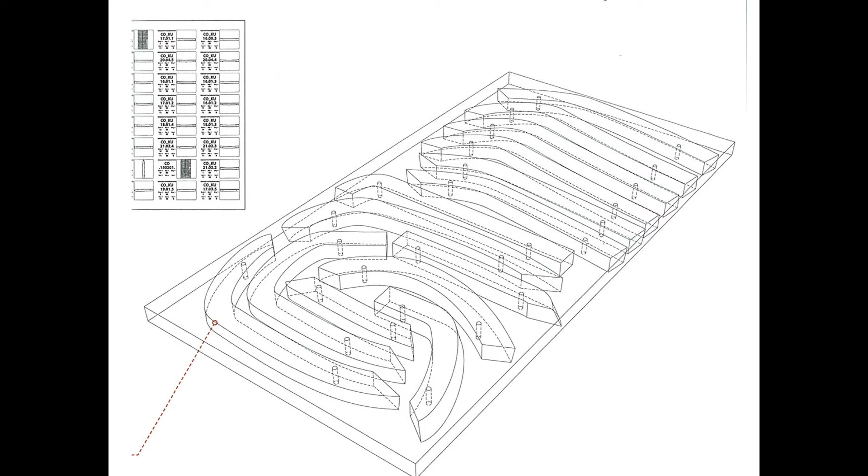in our manufacturing techniques. So here you can see what we do a lot of, which is a just-in-time manufacturing process where we're able to send our computer files to be fabricated, often in different countries like China. And this is an example from Zaha Hadid, which then can come to site even though it's fabricated in another country and fit together perfectly and get a beautiful result.

So I'd like to start with the first project where we apply our 3D digital technology to facade technology and come up with interesting, exciting designs on a project called ELIZA. Now, ELIZA is located here in Elizabeth Street in the centre of Sydney, opposite Hyde Park, a very famous park. We use our parametric designs to identify that there are different views from different levels, and accordingly we have also different sun orientations.

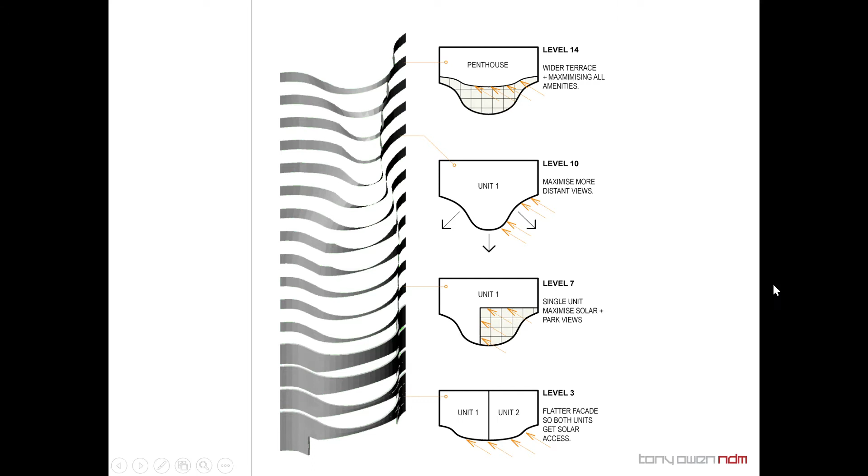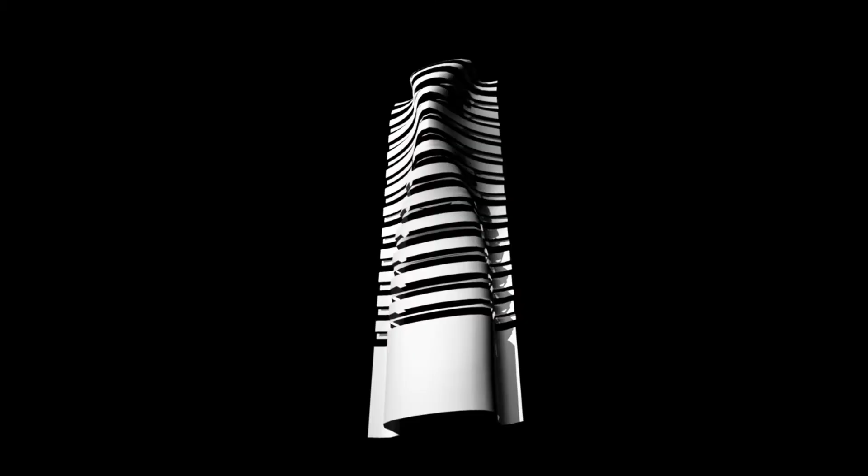So the shape of the building at each level changes parametrically depending on what the views are, what the sun is, etc. And you can see here on lower levels we have a pair of units with one shape floor plate, and as you get higher up a single unit per floor with better views and different orientated views, so you get a different shape. So the model that resulted from this reflects the fact that the conditions at one level are quite different to another level.

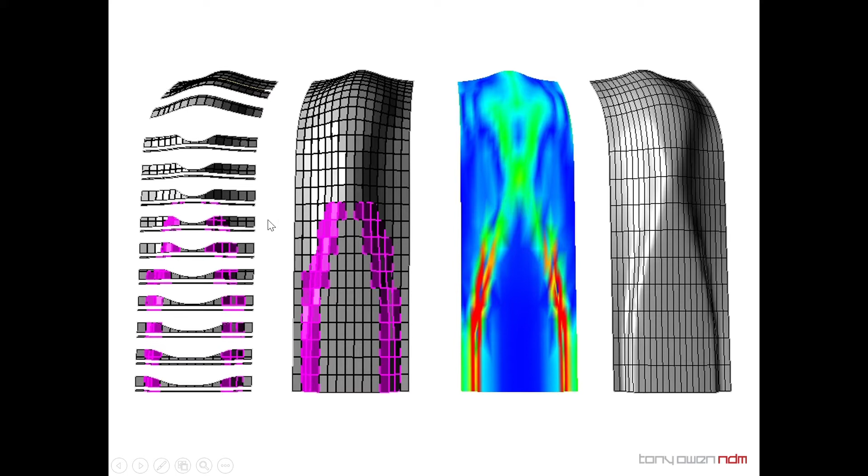And we then use the 3D digital software to identify how we fabricate this. And this starts on the right with the shape. We then do some analysis of the different curvatures and therefore the different stresses in the facade. And then we standardize this, and that results in the panel package. And this then goes on for a more sophisticated Rhino model. So this facade was actually documented in Rhino. And you can see an example here of looking at the different stresses on the facade and the different curvatures.

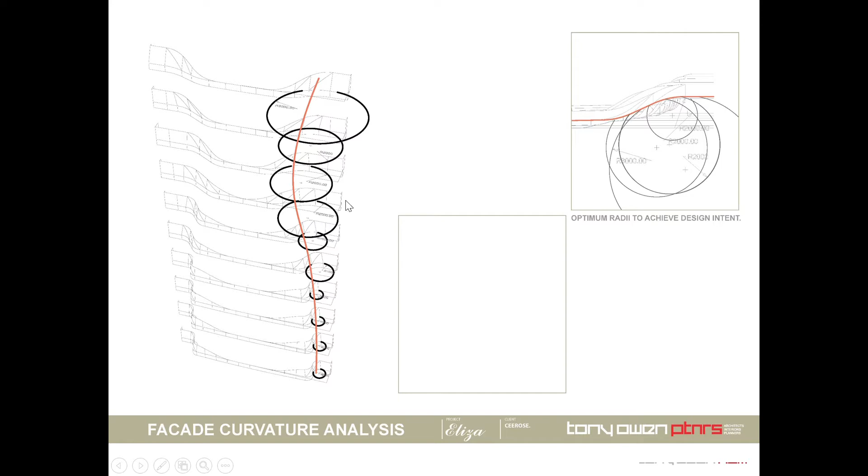So what we're trying to do is use the technology to take a complex facade and actually make it a lot simpler to build. So we're trying to, in the design development process, take out the randomness and add some rationality. In this case, we look at the curvature on the point of contraflexure here, and so we can have as much standardization in these panels as possible, whilst it appearing to be quite random. In fact, it isn't.

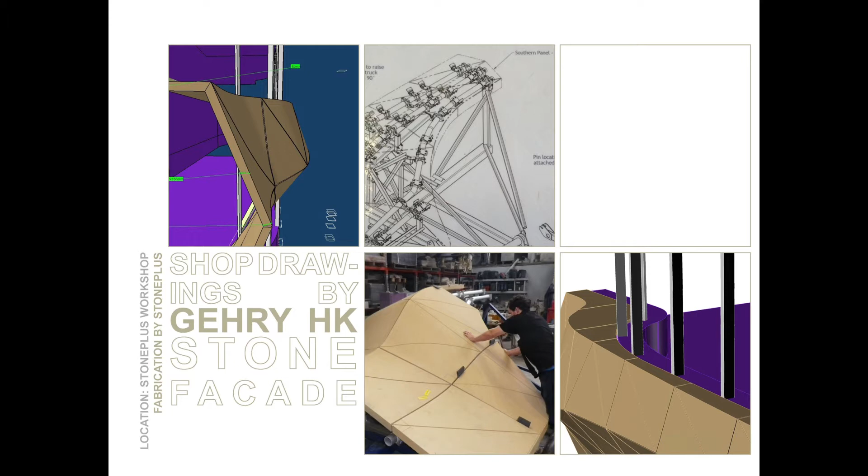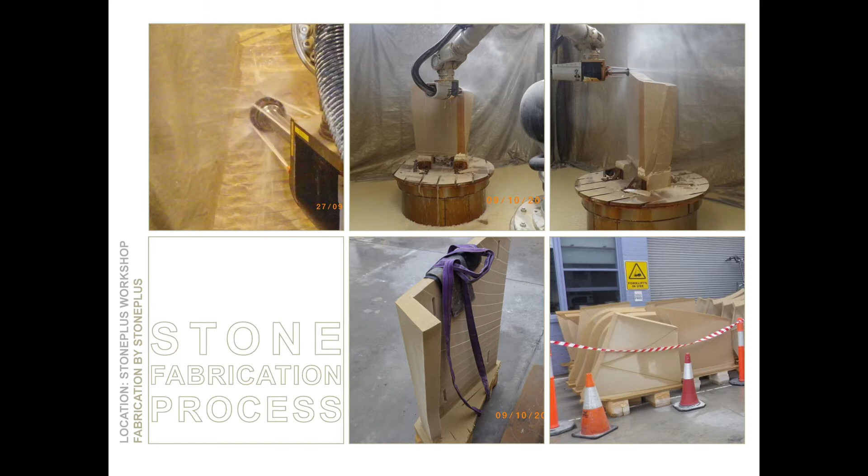And this carries through to a one-to-one prototype which was prepared, and this was carried further in the Rhino model, and that was actually a model of the podium, which is done in sandstone. This sandstone was actually again created as a one-to-one prototype with some sophisticated steel work. In this case, Gehry Technologies helped us with the facade engineering. The stone itself is cut out by robots according to our files, and so it fits together perfectly.

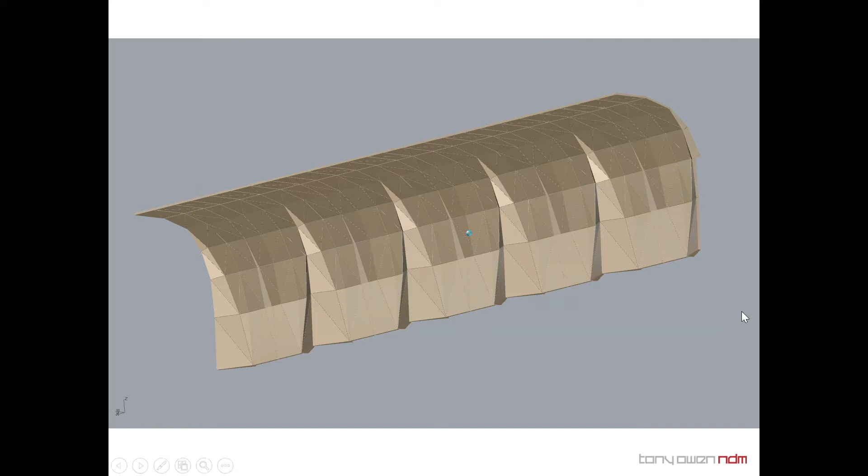Another project which we used some similar techniques in what we call radical pragmatism, where we take problems on the site and try to solve them very pragmatically, yet at the same time producing some very extraordinary results. This is a site in, again, a historical part of the city, where we were heavily overshadowed by other buildings.

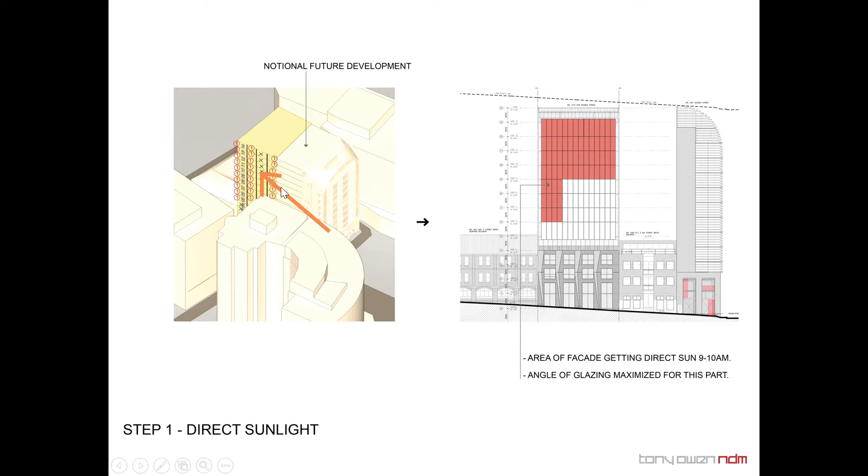Now in Sydney, the regulations and controls make it very difficult to have residential uses where you have very little sunlight. In this case, we had very little sunlight. So under normal circumstances, without the technology, we simply couldn't have an apartment building on this site. However, we looked very carefully at where the sun was coming in to try and maximize it. So you can see here we started mapping the angle that the sun was coming at different times of the day and where it was hitting the facade. This actually included reflected light from other buildings as well.

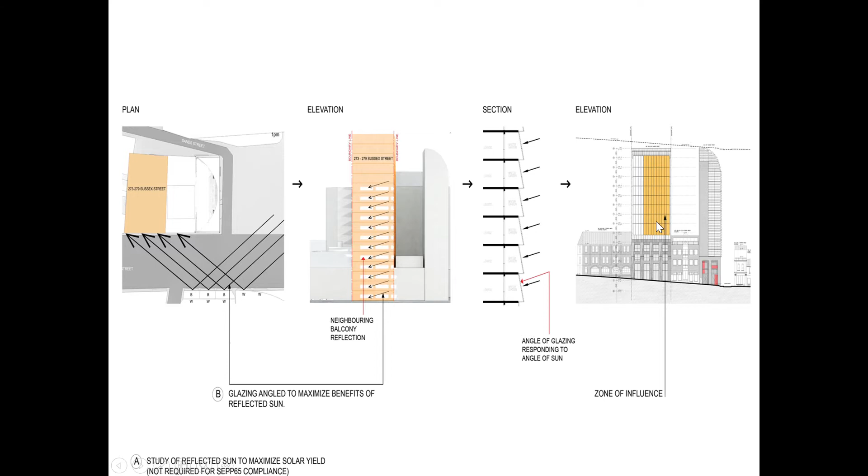And at different times of the day, the sun would have a different angle, both in the horizontal plane, but also in the vertical plane as well. So what we ended up doing was mapping on the facade where you got the most sun at a different time of day, and then angling the windows both horizontally and vertically to capture the most amount of sun when the sun was hitting that facade at its strongest. So we ended up with a facade where every window had a different angle, and that angle was specifically mapped and designed according to the maximum sun.

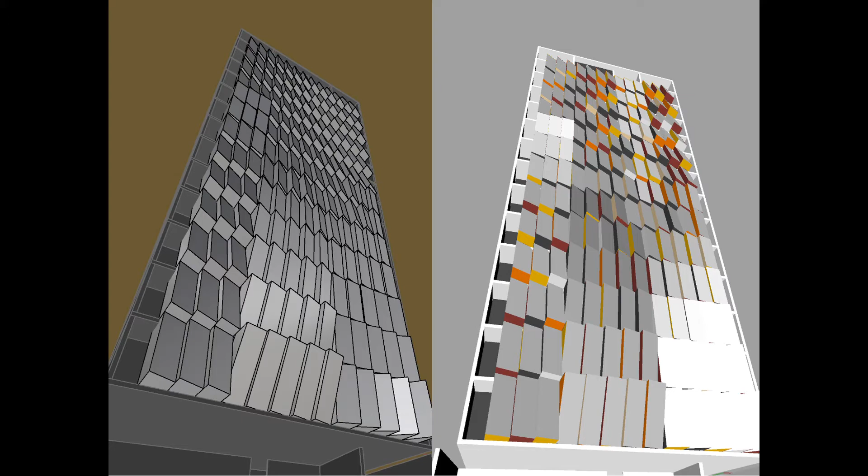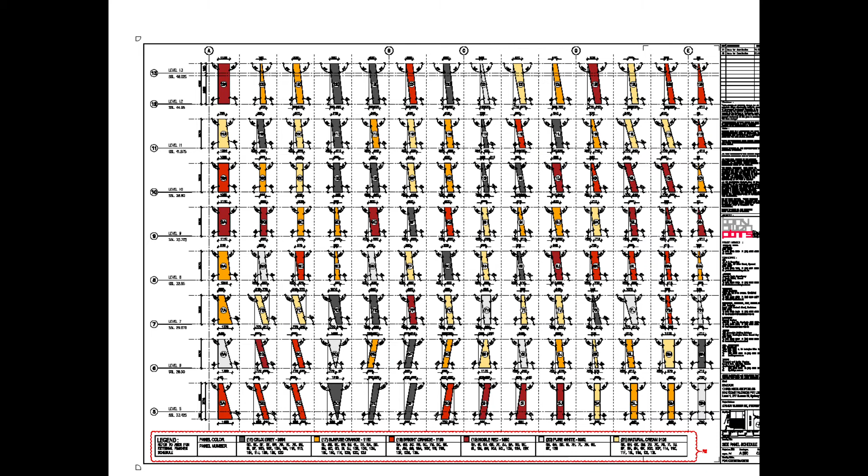We then turned this into a set of construction drawings, and again these were fabricated overseas and imported and fit together in Australia. So using the technology to ensure that prefabricated and remotely fabricated components come together and fit together perfectly. And we use some fairly extensive packages in order to convey that information. And the resultant building is both beautiful but highly practical, and that allowed us to get residential uses on a site where ordinarily you couldn't.

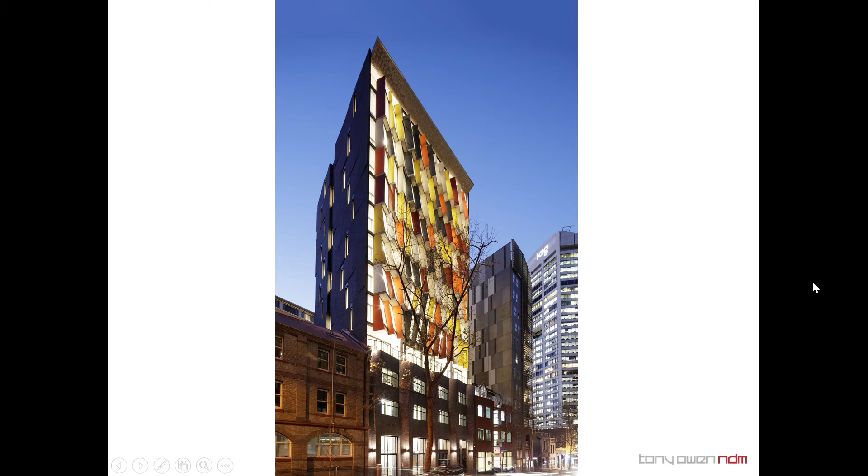So you can see here you have a brick podium reflecting the masonry character of the surrounding buildings, and then our Suncatcher facade, which also became a very beautiful facade with coloured panels, and we ended up calling this building Mosaic. And you can see at night time, from the different angles, you would get a completely different picture. Here, the coloured panels on the angled bay windows reflect a much more coloured facade, and you can see that during the daytime as well.

But from different angles, it's quite an open facade. And this was an extremely successful and also very beautiful building. And so you can see the technology driving the facade and pushing the technology to get a very pragmatic but very radical result.

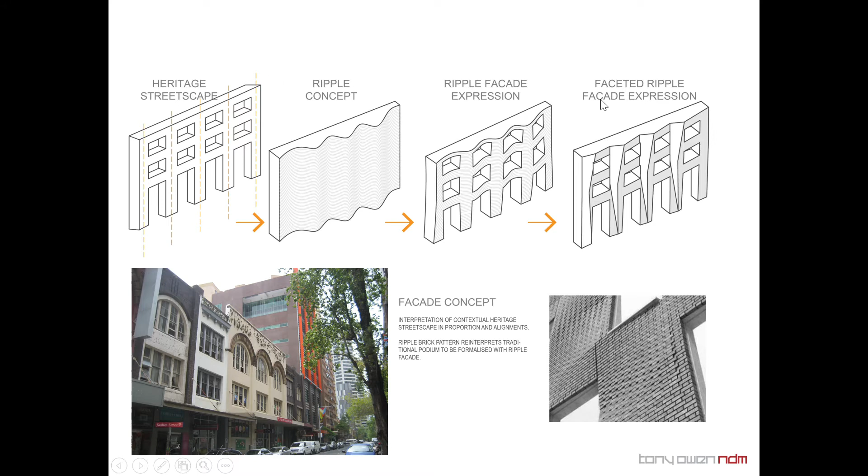So here you can see the podium facade, which reflects the pattern of the surroundings, yet also reflects the geometry of the building as a whole. And at night it becomes also a very beautiful addition to the streetscape, as does the whole building.

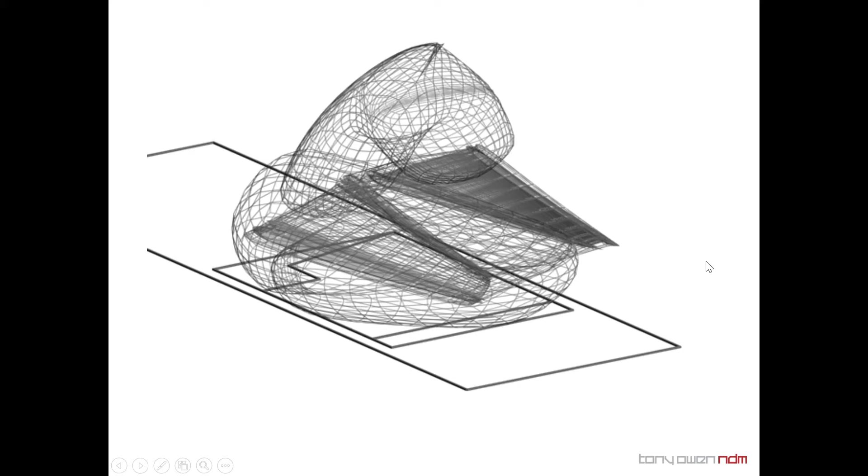Another project where we took our idea of radical pragmatism and digital technology was a suburban house in Sydney, enjoying some views, and we looked at various different models in order to generate the idea for this facade. And ultimately we often use a real-time model such as this, which we can stop at any time, in order to explore different geometric solutions.

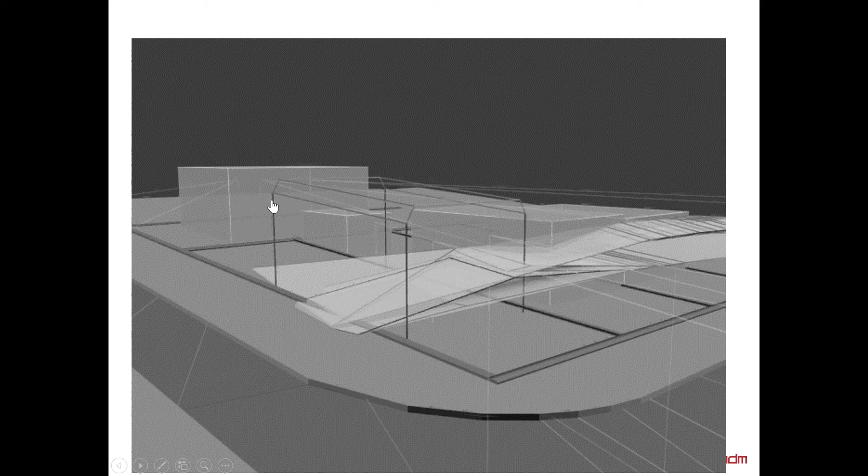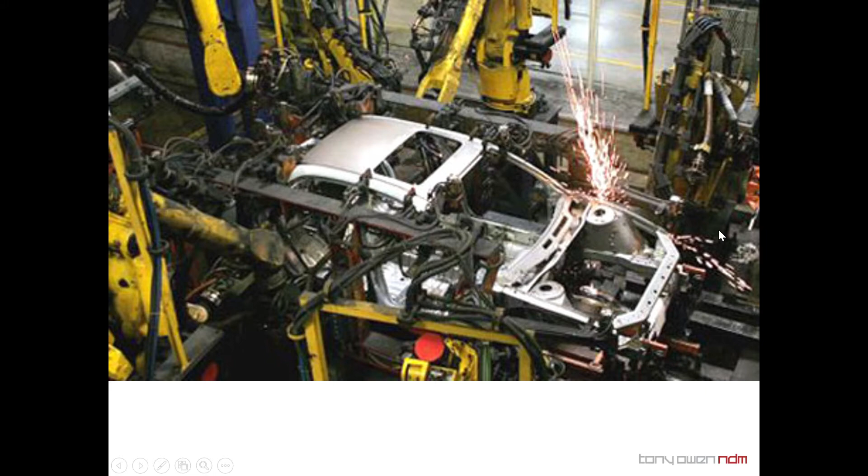In this case we were balancing issues such as sharing of views between different buildings, and also maximizing ventilation and through-site links as well. And we ultimately resulted in this model. This actually became a shell where we clad the whole building in metal panels, and so it ultimately became akin to an automobile construction system, where we had the frame on the inside and then the various components and cladding that went on the outside.

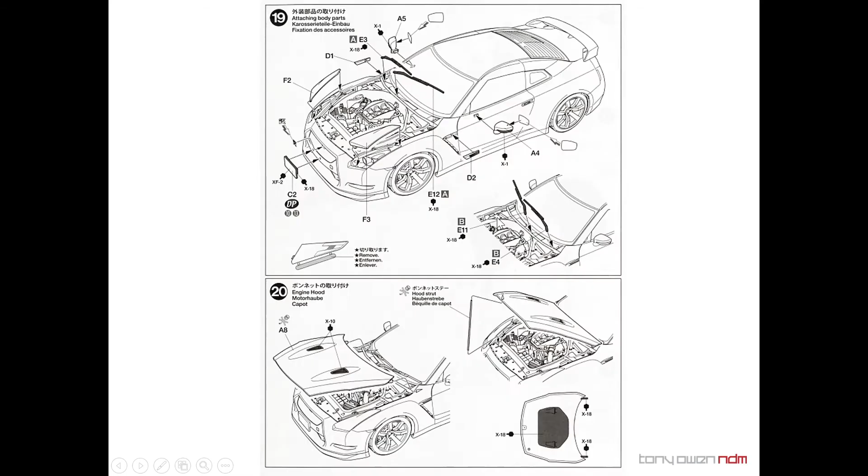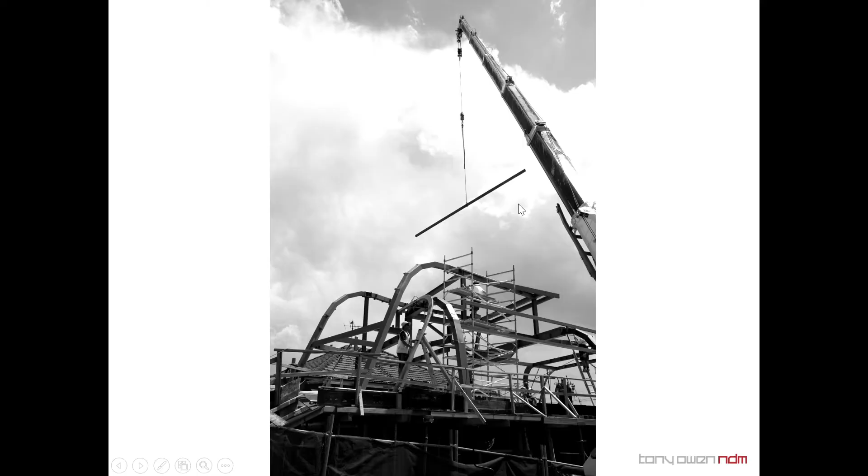And also here's the frame being assembled on site, and ultimately the cladding, and you can see the 300mm services zone here. And this then carried through to the building itself, which is clad in aluminium panels and is very beautiful.

So the geometry was actually determined in terms of maximizing views, sharing of views, maximizing natural airflow, and minimizing overshadowing and light as well. So this millimeter by millimeter use of the 3D technology to maximize the efficiency of the building, but ultimately have a very beautiful sculpture as well.

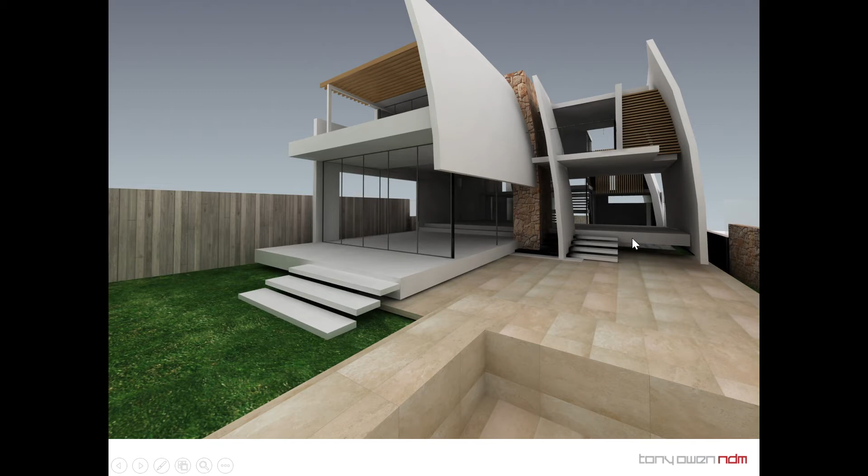Another building where we utilised this technology was Bill's House. Now, Bill's House here, I won't go into this one in detail, but it was generated from the Mediterranean background of the client, and this was the sails on the Mediterranean harbour. And this became a really beautiful sail house, again using steel technology internally, and panels and render on the outside.

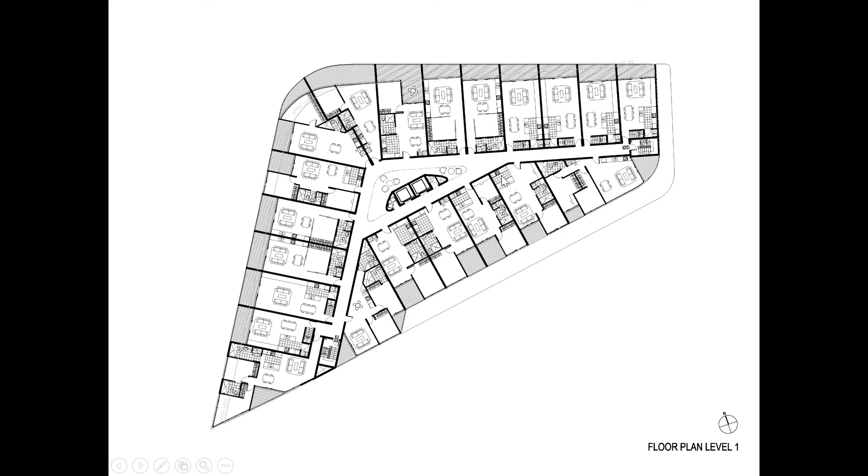We use the environmental principles of the site. There's a central space in the middle and balconies and buildings all the way around. What that allowed for is natural ventilation coming through the building to minimise heat gain, to minimise energy use. We here explored the notion of really celebrating the balcony as an outdoor space in the Sydney climate.

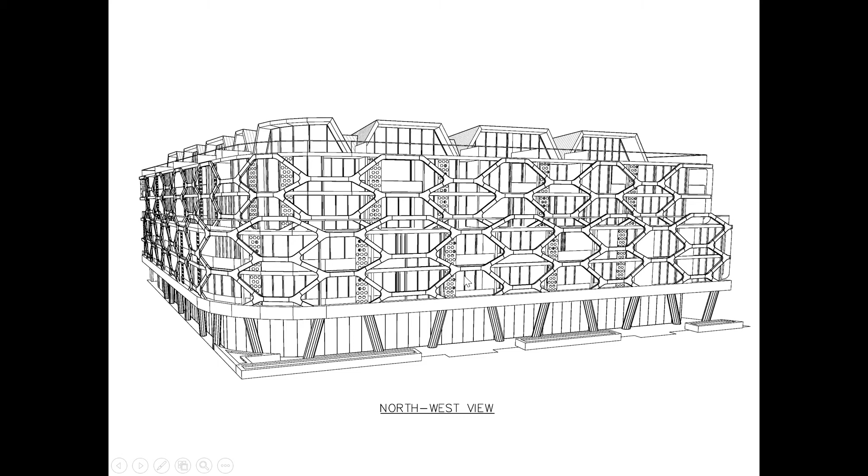And we also thought, well, how do we deliver this exciting facade and this technology very affordably? And what we did was we broke it down into effectively two components. We have the stick, or the long piece, which was always the same, and the node. So you had basically 1, 2, 3 elements, and that was repeated, allowing this entire facade to be built for basically the same as a normal facade.

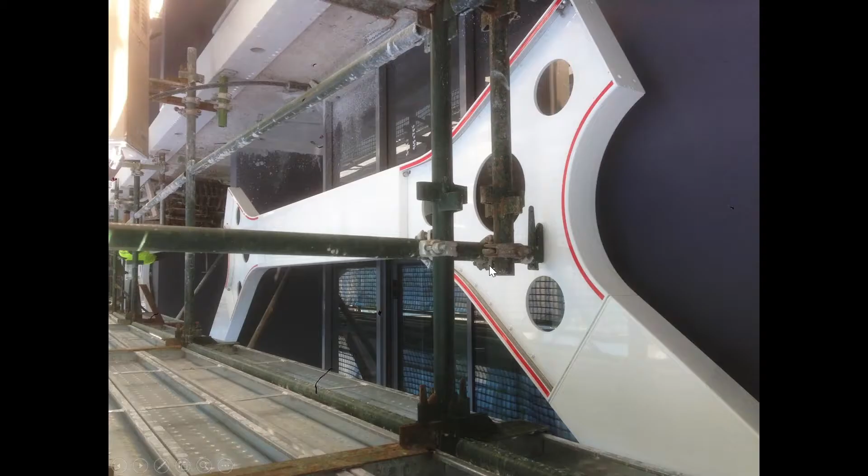And you can see here that this element and this element are always identical, and this is the same. So in fact, there's only 2 elements, and these would come together using a component. Now, ordinarily, when something like this is done, you would have to have framing, and you'd have to have panels and insulation. In fact, each of these pieces was a single aluminium extrusion, significantly reducing the cost of this element.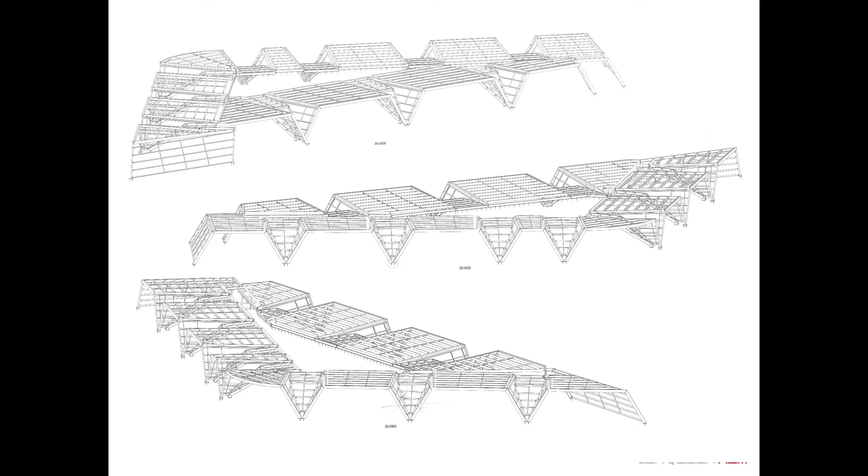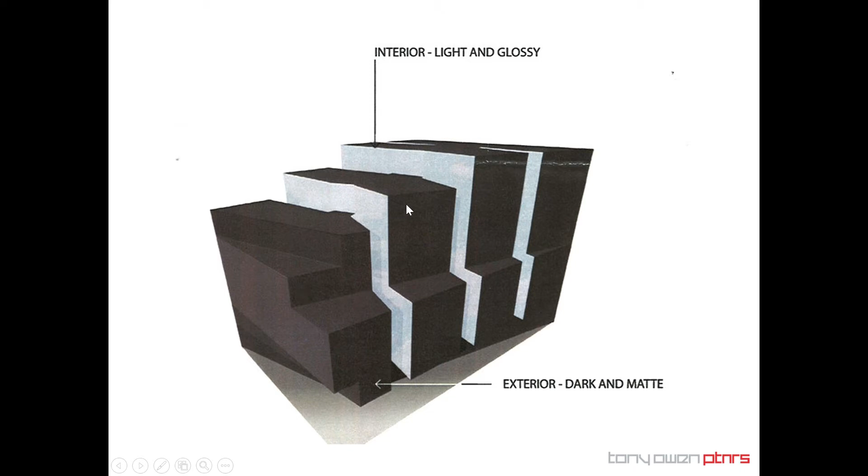Another one, this is also in the city, where we had a brief to design some student housing. Again, the trick is to maximise the surface area and the yield, which is natural light, but maximising privacy. We took the sites and we divided them up into a series of smaller slices, as you can see here.

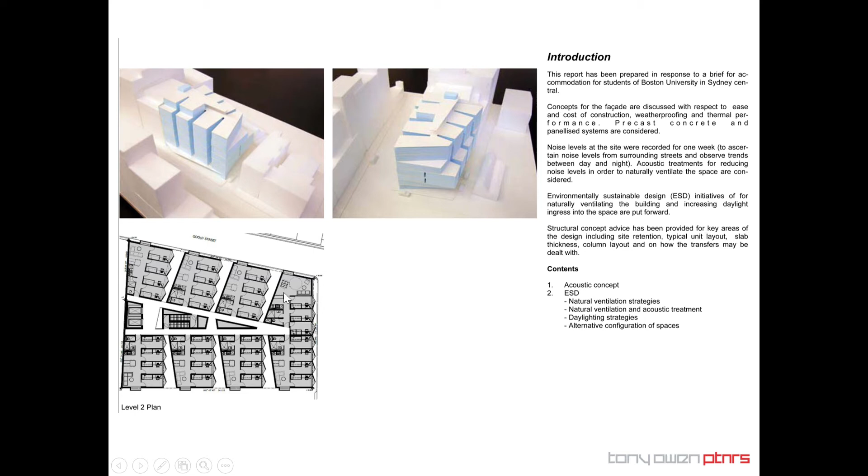Now, normally this wouldn't be allowed, and what we're trying to do is to get all of the rooms to have an external view. So we're increasing our surface area threefold, but allowing for each of the individual rooms for the student housing to have light, but also privacy. So you can see the light is able to come in, and also the ventilation.

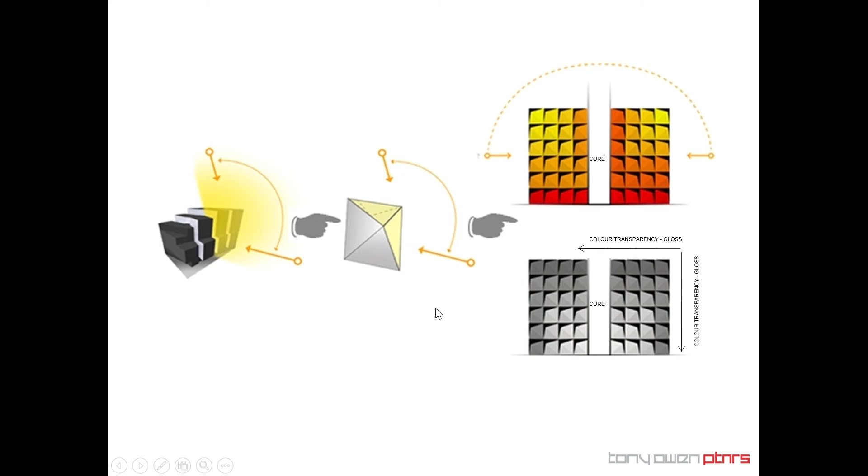Again, we had a 9-story atrium to allow natural ventilation via glass louvers. So the airflow works very well as it comes up through the building using the Venturi effect. But at the same time, we're trying to maximize privacy by not allowing people to look into each other's views. And we ended up using these window boxes here. And this was very successful.

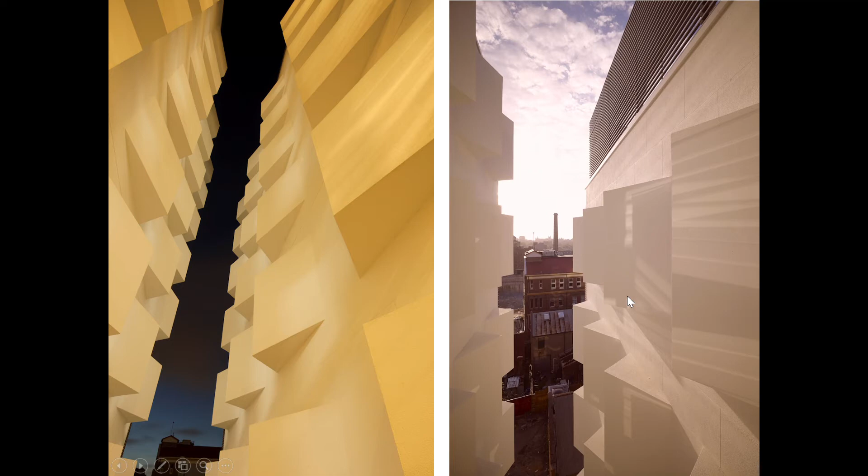And what you can see is that everybody gets a view, everybody gets sun, but nobody can see each other. And you get this really interesting dynamic and really sculptural play of light within these cabins within the building. And of course, the glass louvers allowing natural airflow throughout the building. So here you see that privacy working with somebody at their desk, and also at night time it's lit up in a very beautiful way.

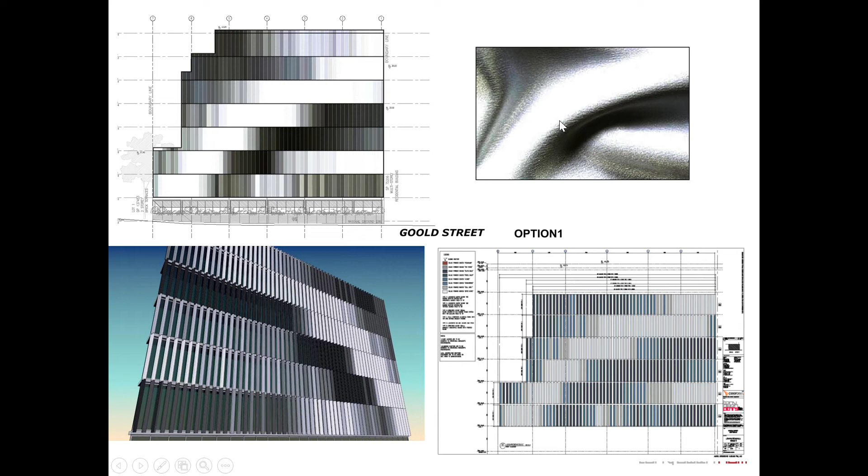Another building which was all about how it presents to its context and environment is what ultimately became known as Eden Art Hall. As you can see, a very public part of the city. In this case, we tried various different geometries, and we played around with the idea of the building as billboard. So what we did was we looked at various different pieces of art, we pixelated them, and actually had an online competition which people voted on, and ultimately selected this fabric pattern, which was then pixelated and turned into the facade of the building.

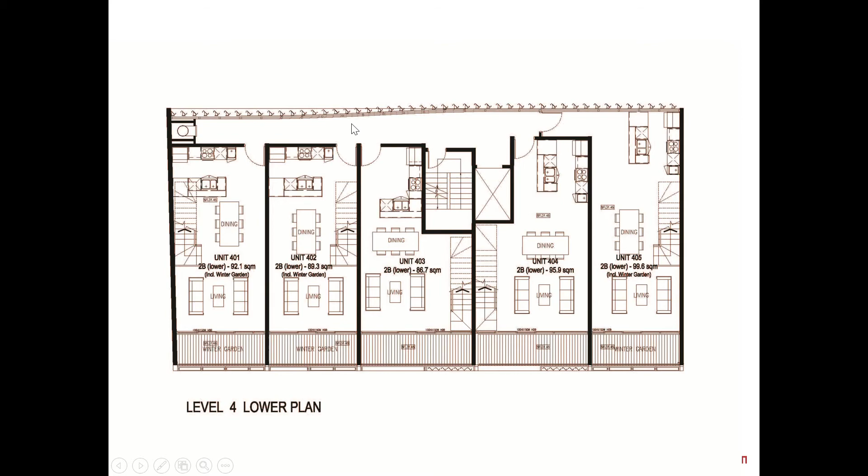And this is the eastern facade with a lot of circulation, so it became a sunscreen. And we used a palette of six different colours. So again, how do we realise this project affordably but also very beautifully? And you can see using two-storey units how we maximise the circulation at the rear and the public spaces at the front. And this was ultimately the building, which really presents a very positive piece of art to its environment, using a limited palette of colours to transcend the norm, using the technology to do something special.

And this carries through here, as you can see, to the rest of the project. And this is the street facade, which is a little bit more subdued and sedate with the public areas. And here's a typical example of a living room.

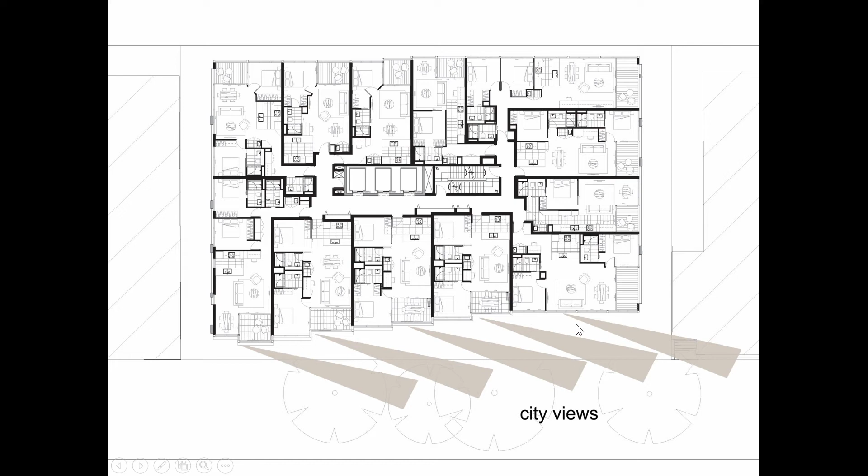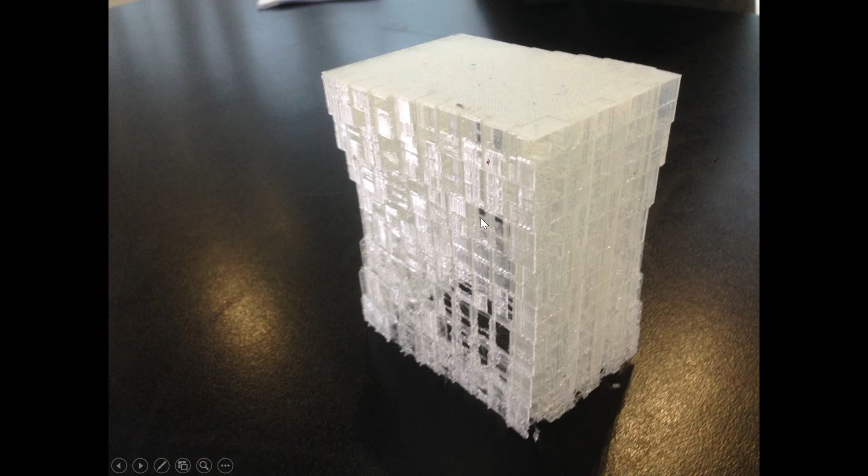This is a project with a similar concept to the facade, where we have a site in Brisbane with oblique views to the city. So what we're trying to do is, here's the site, to maximise the views in this direction. So what we did was we angled all of the units out to grab as much view as possible. And here again, the idea that on every level the view character is different. So ultimately we plotted those parametrically to determine where the windows and the building would come out and where it would recede. And we modelled that in 3D and also using 3D printing.

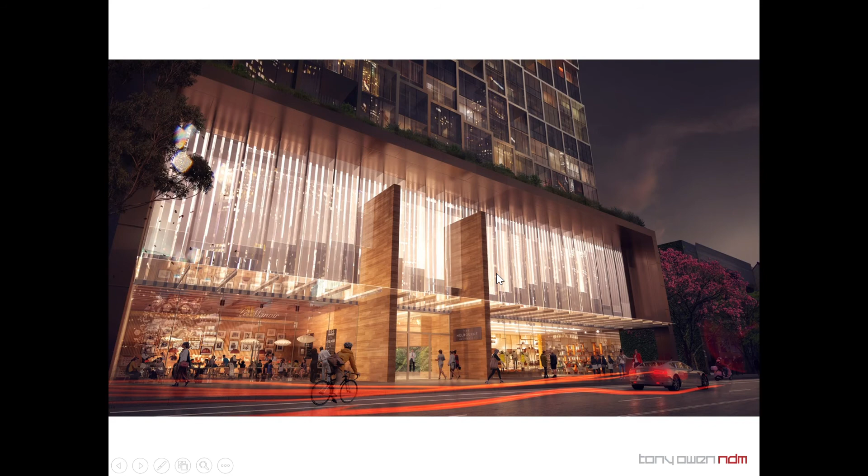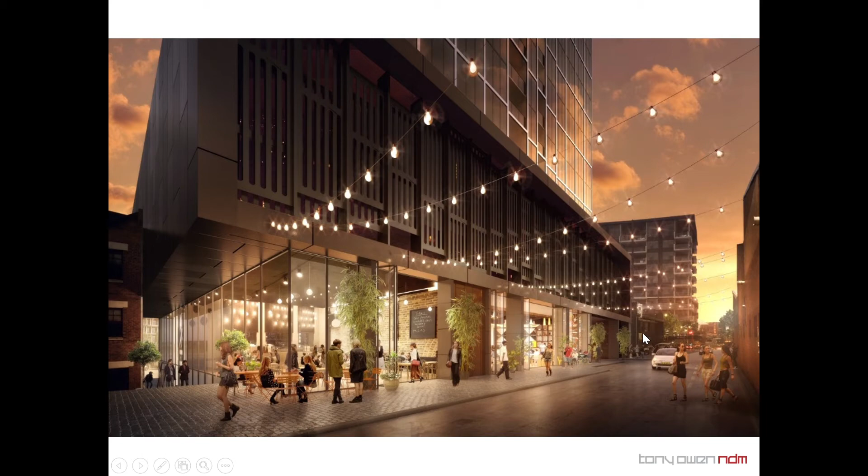We used a similar idea of this undulating pattern in the retail podium, which ultimately has a series of layered wave patterns to also mask the parking, and that's actually carried through here as well. The laneway at the rear was further activated, and we envisaged a retail activation of what was a very poor laneway, and that's ultimately been very successful as well.

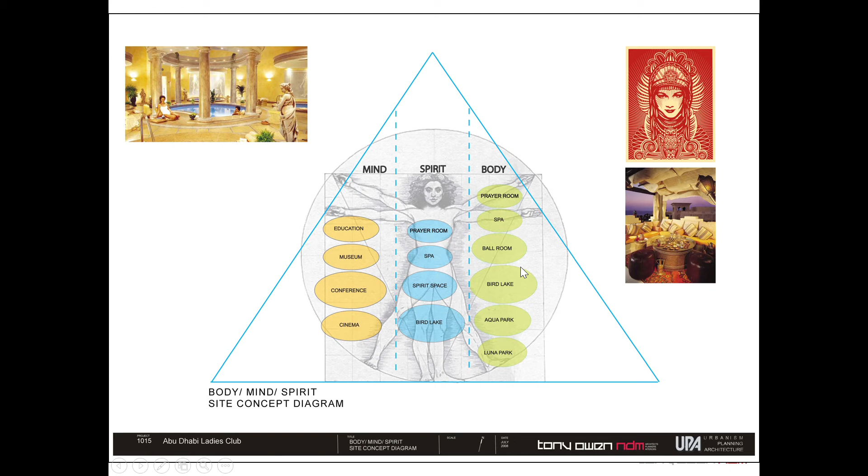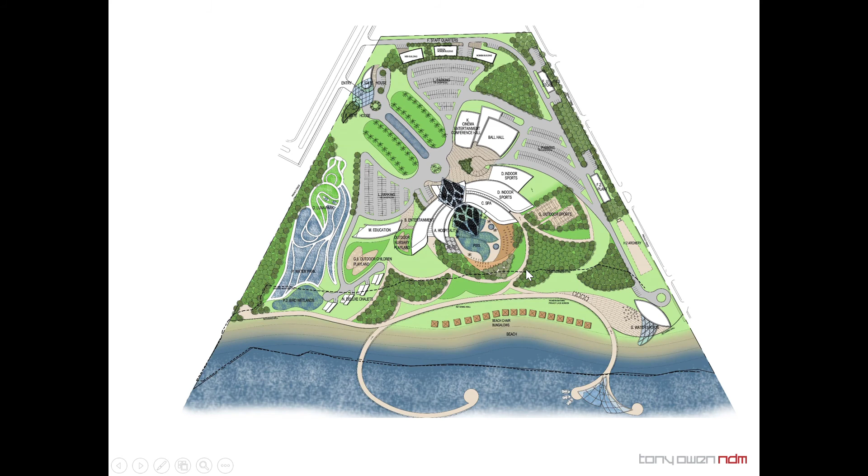An interesting project for us in terms of uses as well as facades was the Abu Dhabi Ladies Club in Abu Dhabi. This is the men's club, an officers club, and they wanted a similar club for ladies. This was the site, and it's effectively a $100 million spa, but it has education facilities, museums, conference facilities, sporting facilities. Our initial idea was the flower, which you can see carrying through here, that resulted in the ultimate master plan with its own beach, protected of course with a series of view screens, swimming pools, indoor sports facilities, etc. It has indoor swimming pools, it has indoor courts.

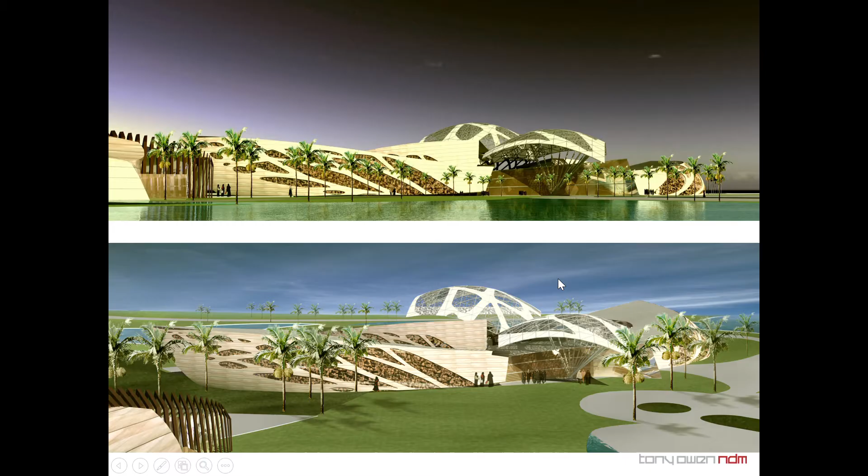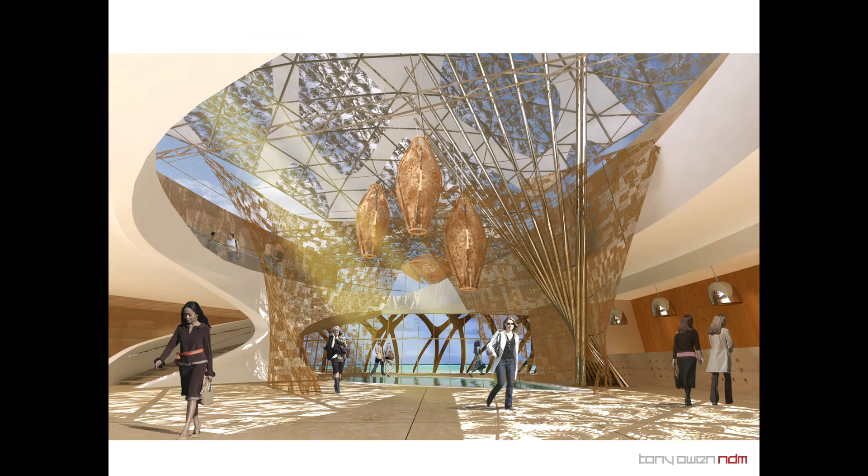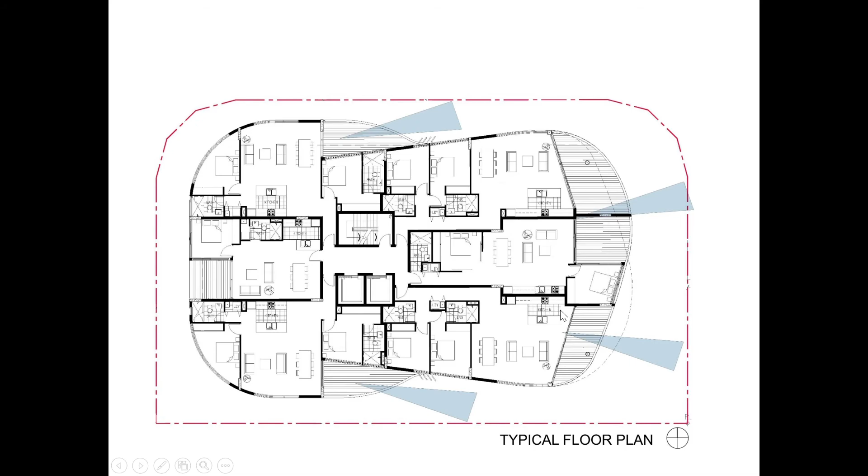A project in Mooloolaba on the Sunshine Coast in Queensland, where we took as our inspiration the estuarine patterns on the water caused by the tidal conditions, and reflected that in the massing of the building. But it's also about, again, very practical solutions to maximising views to the facades, which ultimately ended up in this building here. Now what you see is a solid facade, but becoming less solid as you get to maximise the views.

Now sometimes those undulations are concrete, and sometimes they're, as you see here, perforated mesh. So you still get a view, but also allow the massing and the modelling to occur. And that's fairly imperceptible. So again, really practical solutions, very buildable solutions, but also very beautiful solutions. And you can see the transition from solid to semi-opaque.

So this is a building that's a sculptural addition to the coastline that maximizes views and creates some very beautiful external internal spaces. This is the main lobby, very beachy, and these are the decks, which have double height decks because we alternated the balcony from one side to the other, so we get these double height spaces but also get sun protection.

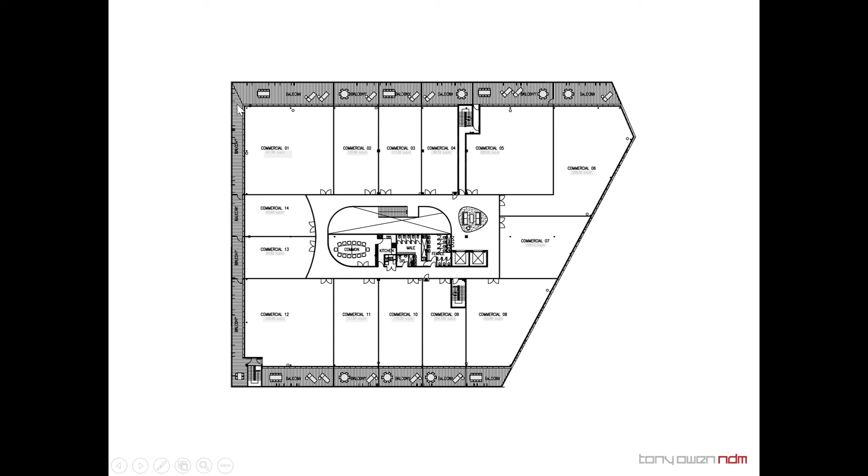A building which is very much a facade project is the Dank Street project, which is actually a refurb of an existing 3-story masonry warehouse building, so a very dull, very solid building, which we ultimately put again a central atrium in to allow natural ventilation, and we put some steel balconies on the outside. So here you can see the atrium being created within what was a very solid building, and you can see applying a metal screen to the new aluminium balconies, as you can see here.

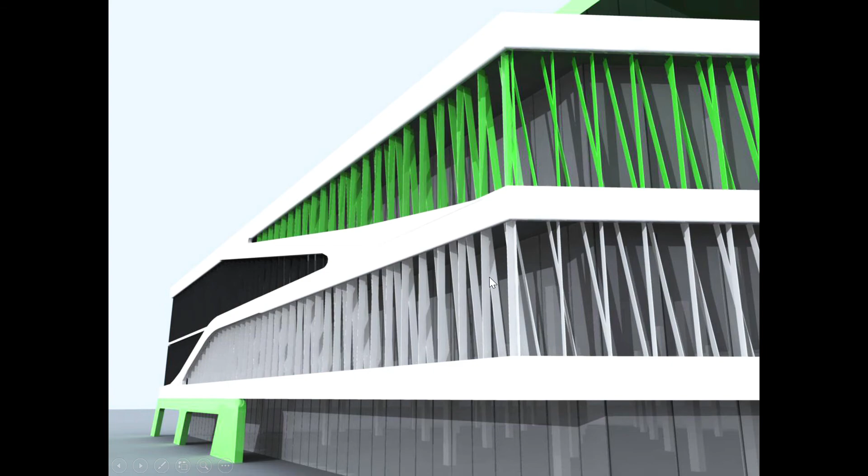Now in this case we looked at a twisted skin. We used just an Alpolic, but put a twist in it to allow for strength. And this allowed us to find a very affordable but also very beautiful solution. Again, you can see here using the geometry to maximize the expression of the building. There's actually a supermarket on the ground floor and commercial buildings above.

It's proven to be an extremely successful building, with a lot of the shops doing extremely well, and also it's really led to rejuvenation of this part of the town where commercial wasn't really seen to be viable before, but we created this destination building, a really iconic solution here. And the facade very much a part of that. But again, our affordable solution using the existing floors, all the existing internals.

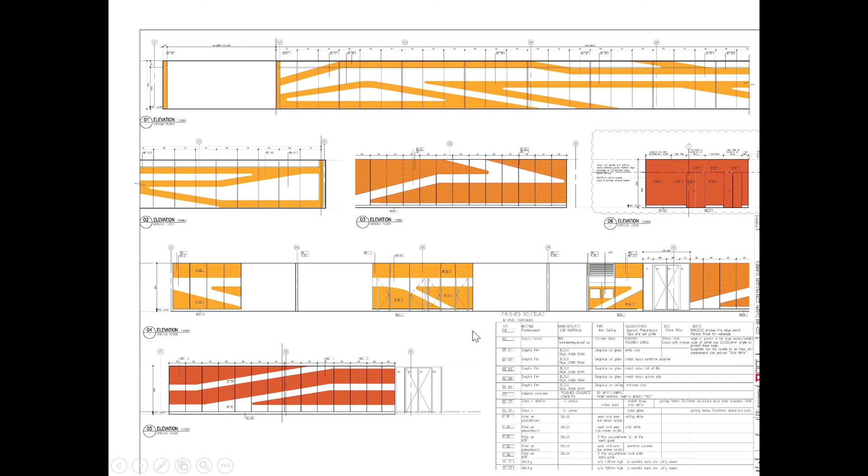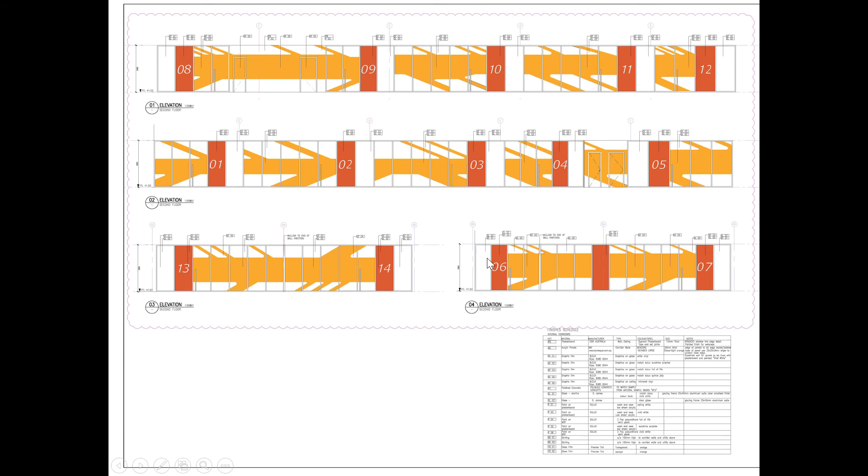Here's that lobby again, but again just basically cladding in glass with some stickers on it, and some very basic interiors to create a really beautiful light-filled space. That's basically paint on the walls, and you can see how the external geometry and the internal geometry is carried through using either paint or, in this case, a wall finish, painted ceilings, and in fact this is the patterning on the glass, which is the corporate ID for the building as well, and the twisted louver fins.

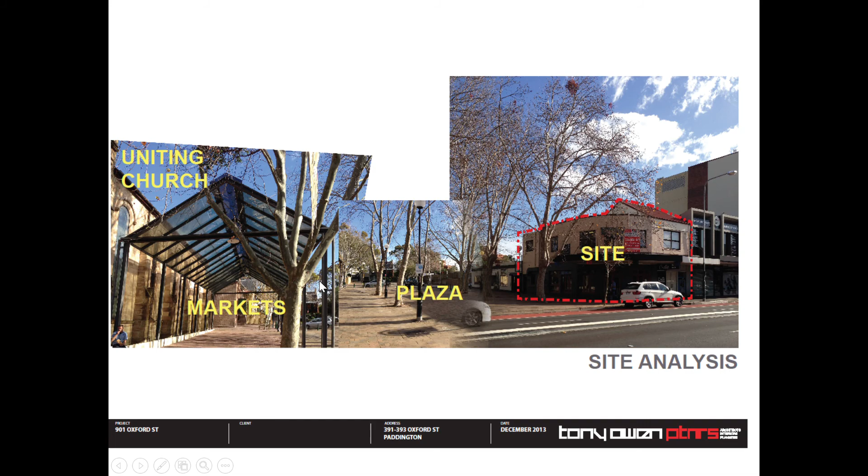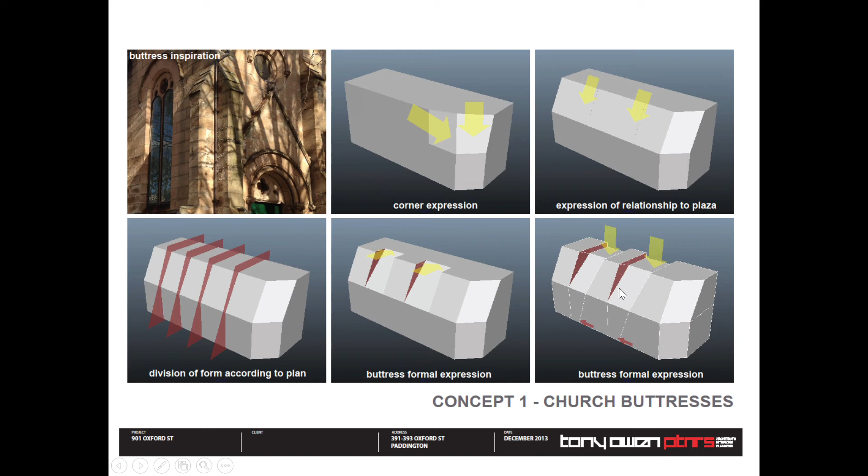A building that's been going on for a very long time in a historical part of the city called Paddington and Oxford Street. This was a fairly famous site with a church which is famous for its Saturday markets across a plaza to our site here. So we had a strong contextual relationship between these two buildings. And what we did was we looked at the geometry of this building as a church and broke it down into its buttress geometry.

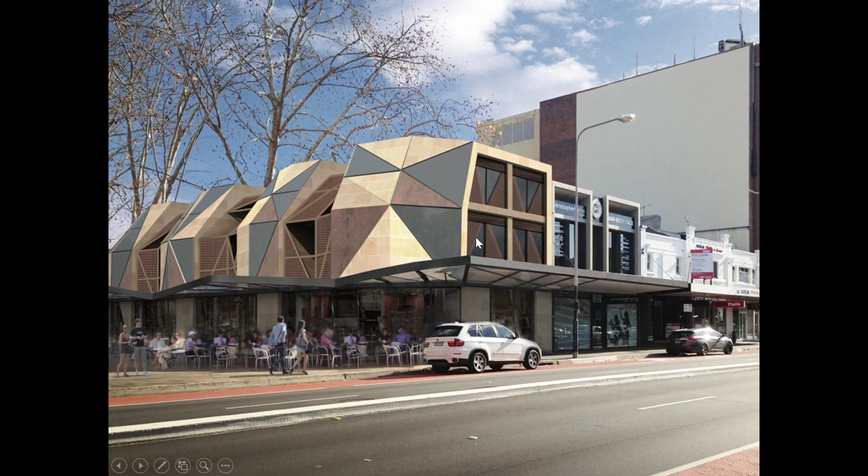And that sort of led to the articulation of the massing, and this was further developed and articulated in sandstone, leading to a building which had a ground floor retail and 2 levels of apartments. And this was ultimately the facade, which reflects the context along Oxford Street, but also its relationship to the church as a residential commercial building in the context of its historic setting.

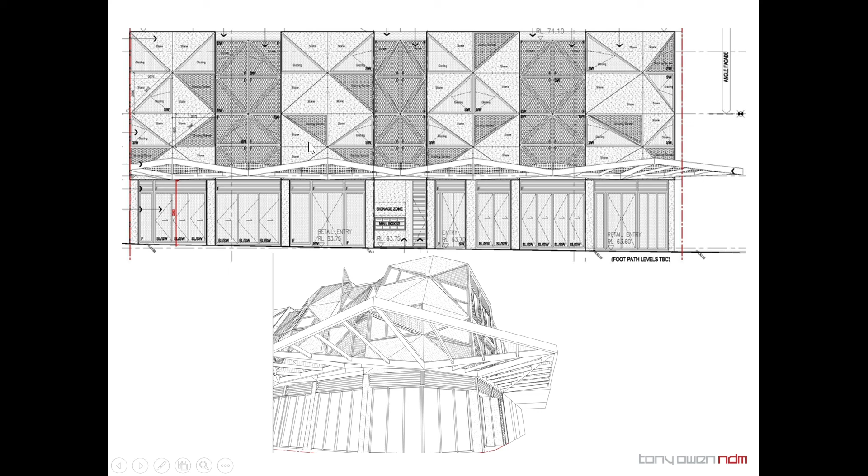You can see 1, 2, 3, 4 units with a central core, and the facade reflecting either a solid element being the bedrooms or the open elements being balconies or stairs. A very operable facade with screens and windows that open in this triangular form, and of course the celebration of the street retail with the canopy.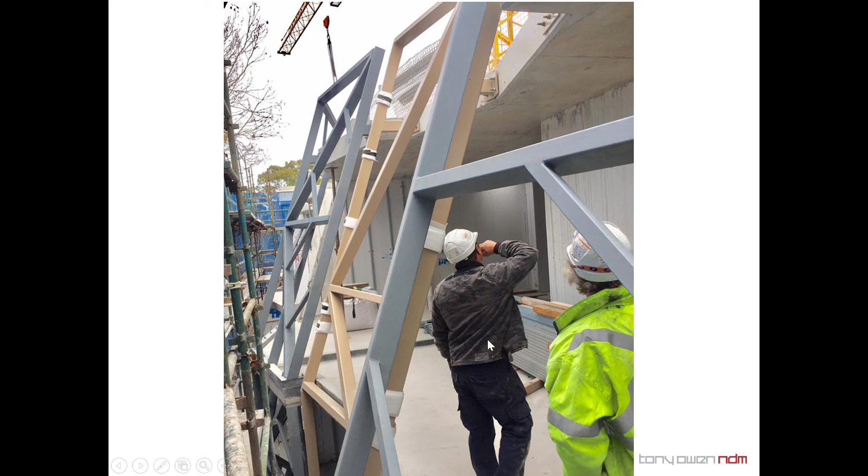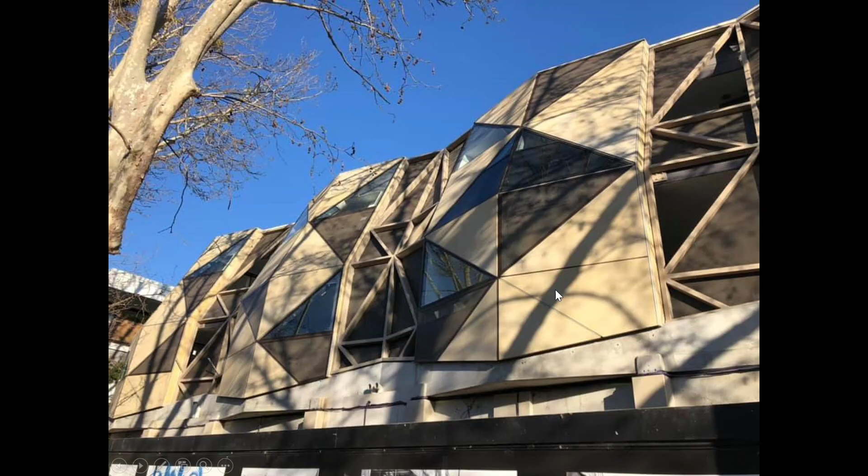This has taken a very long process to build. You can see the initial steel work for the facade carrying through, which was then clad in stone or glass as we went along. And these are some recent pictures, still not finished, largely because of some issues with the builder, and each of these joints is an LED as well, so at night it's going to be fantastic.

So you can see the solid elements, which are a combination of sandstone, glass, and perforated mesh panel, and the operable balcony zones as well. And so this was a few weeks ago, and it's really going to be very nice. And then a few days ago, where we started to see the canopy come on board, so we're very excited for that one.

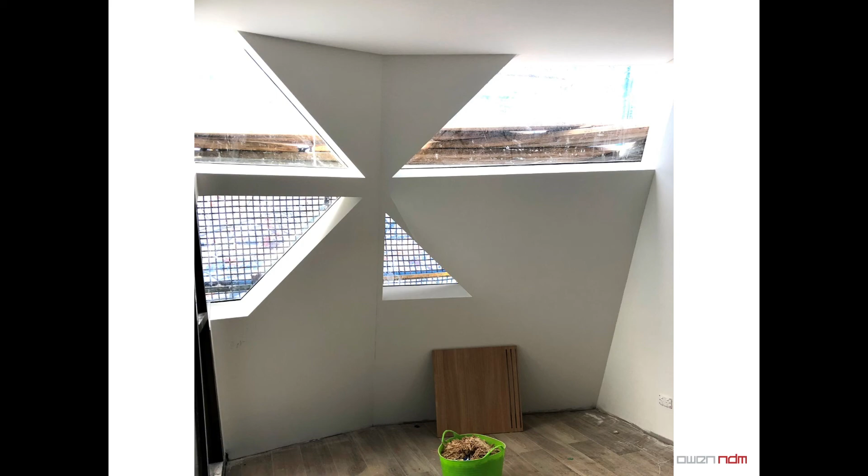And inside you get this really sort of fractal approach to the inside-outside. Another building where we looked at the idea of privacy, a very dense area for a residential project. As you can see here, very tree-lined. What we did was we had a U-shaped building with a courtyard in the middle. There were a lot of issues of privacy to the neighbours, and we were required to do a lot of

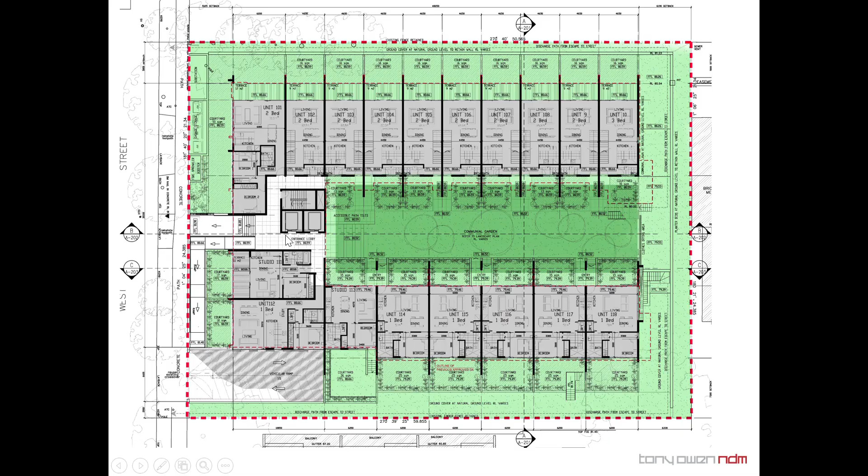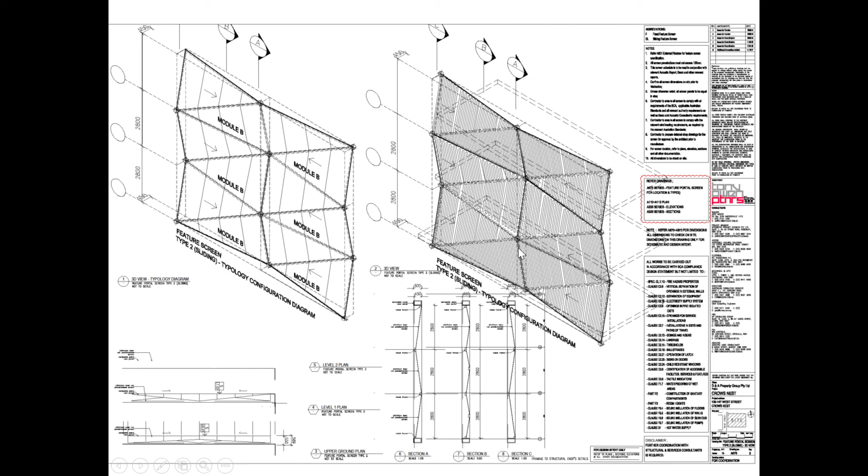screening. The U-shaped design allows for natural ventilation, and you can see here where a lot of the facade has external walkways and screening. This is the street facade, where the screening itself created the geometry or the identity for the building. We used what we call an origami screen here, which was a perforated aluminium screen folded to address both the functionality of it as well as the decorative aspects of it. And these alternated in different bays.

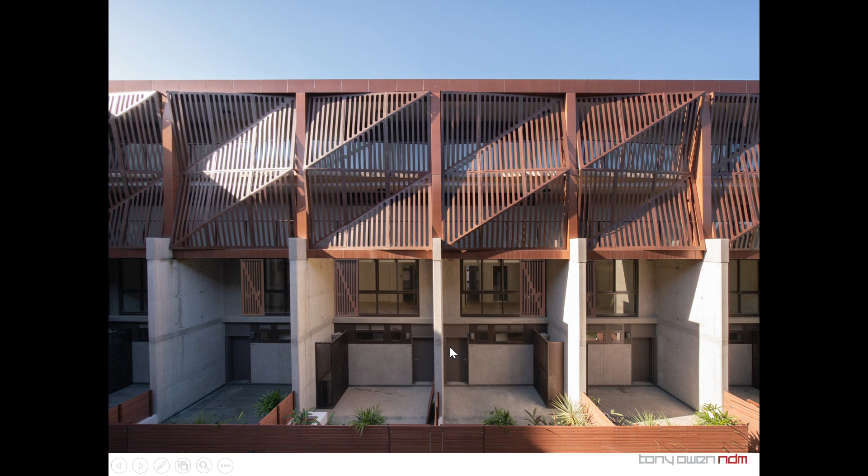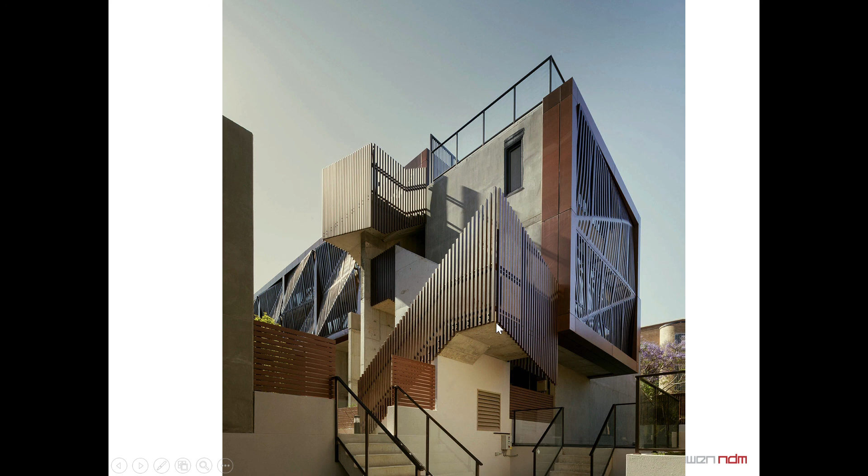Now we introduced a very interesting balustrade here, which actually angles in two directions, and then the metal panel framing, which results in a really interesting dynamic in the building, creating a very strong identity, and it's been extremely successful. Here you can see the walkway with the screening on the outside, which creates a degree of privacy, and all of the nodal points, such as the stairs, articulated using the same aluminium elements that frame up views.

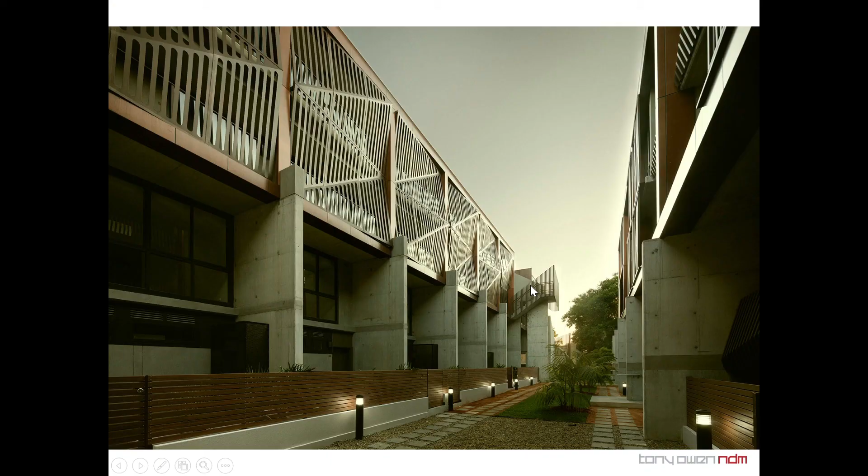Here you can see the geometry of the balustrades, and that carries through to the working drawings again. How do you realize it? This was not done in steel but aluminium, which is a lot cheaper, and basically it's a single element with a bend in it. The leftover pieces became a sculpture. So again, very practical, very pragmatic solutions to allow a very affordable building that transcends the norm.

Another building where we did a similar thing, a very affordable tower in this case, just alternating between a solid concrete balustrade and a glass balustrade to create a very dynamic and sculptural effect that transcends the norm. So this is a building near Sydney Airport.

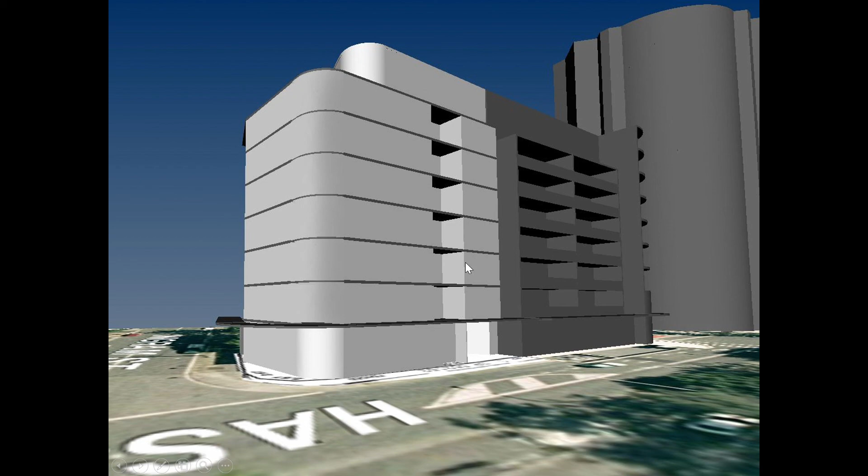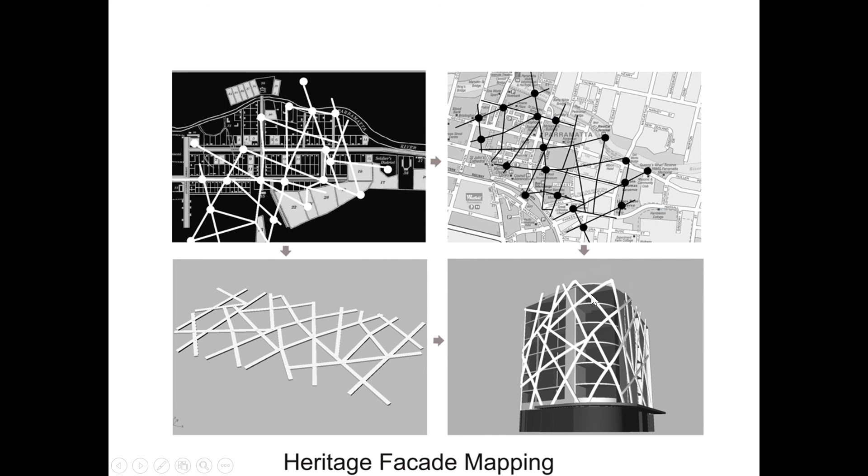Building in Parramatta, a satellite city in Sydney, where we had a corner expression with a series of units around a central core, fairly normal situation. In this case, we had to deal with a lot of issues relating to heritage and public art. It's actually, again, a historical part of the city. And what we did as part of the public art component is we tracked the historical grid pattern of the city and the public spaces onto the new grid pattern, which was a later grid pattern, and actually applied that to the whole facade as public art. And then the fun was getting the technology to work.

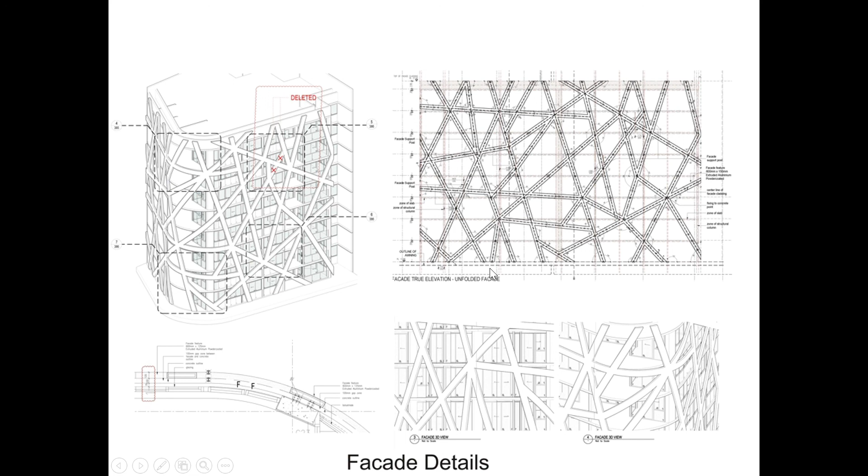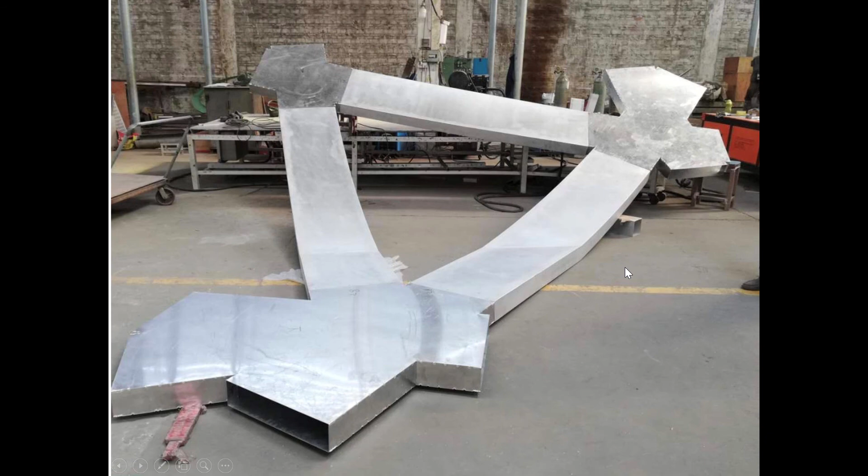A similar idea is the Alpha apartment, where we used a single aluminium extrusion and a nodal point, although in this case every node was different, and it wraps around the building. So a development on the previous technology, and you can see here a node and a flat element, so whilst it's a single extrusion here, it did sometimes have a curve, and each one was different. These ended up being some quite large elements fabricated in China and imported, flat packed, and ultimately went on the building. So this was extremely successful. It all fit together based on the precision of our drawings.

So that's it. I hope you've enjoyed our presentation about how we use 3D digital technology to realize commercial projects that transcend the norm. Thank you very much for listening, and I hope you enjoyed it.